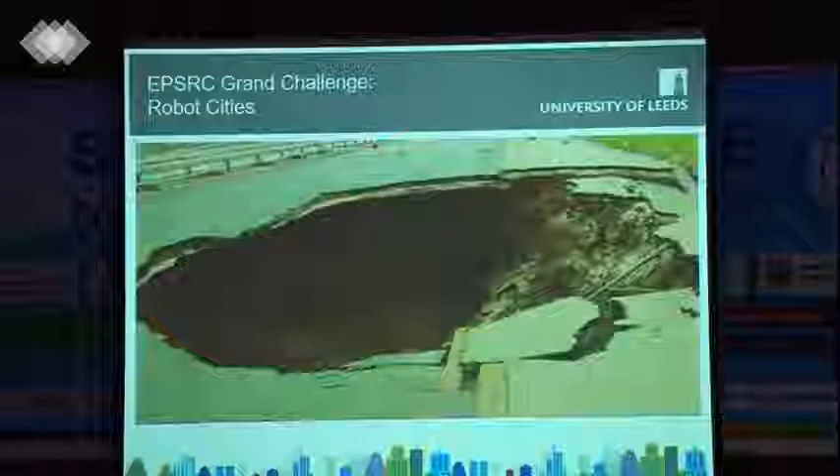Small crack results in this huge problem. And to fill that up, it's not a question simply of plugging it in. You've got to dig it all out, get material, put it in. It's a massive engineering job.

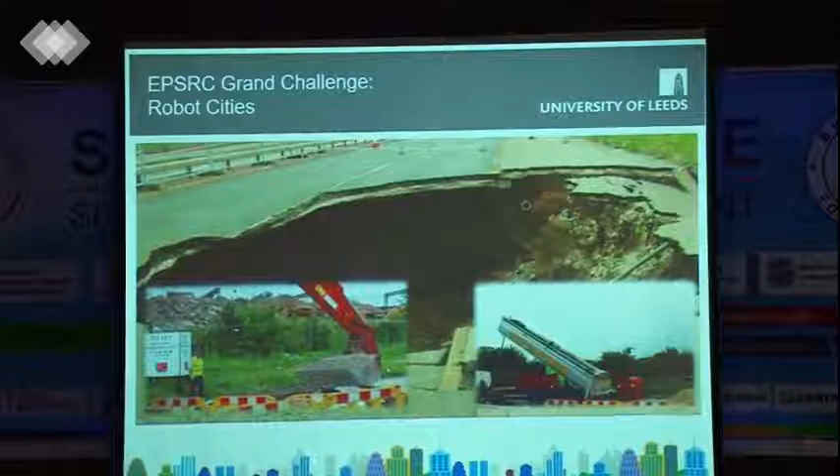So this project's really focused upon what we call minimally invasive or small-scale repair. So let's try and find problems really early on, fix them quickly, simply, and then this kind of problem doesn't actually happen, which is what we're trying to do.

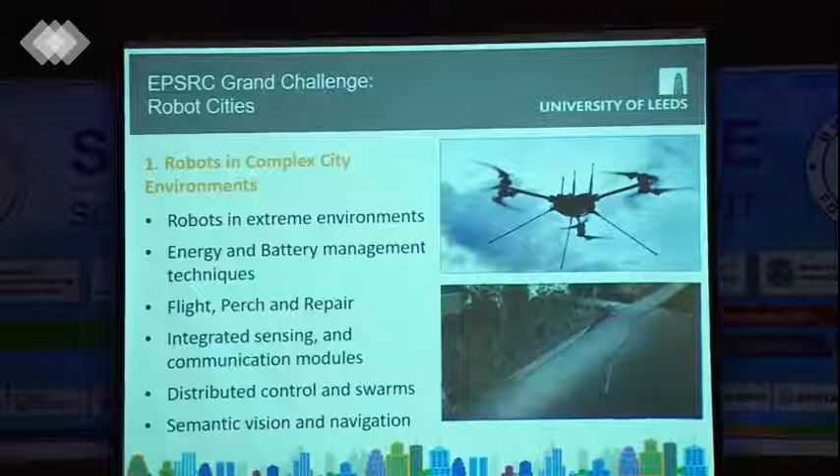So in the projects generally we have all kinds of autonomous robots. We have robots that can fly, perch on things, do things. Sensing is of course very important, sensing on the ground and in the air. We have to be able to apply materials to repair. So we're doing lots of work with how you can 3D print and deposit materials.

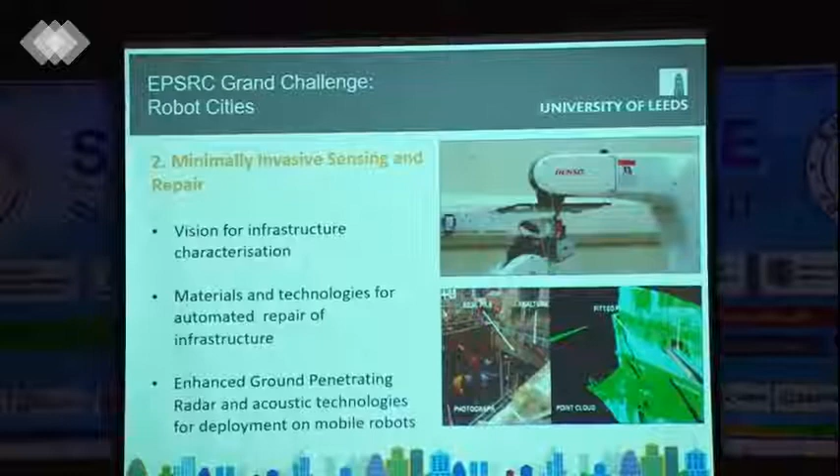So it's great to go and find a problem. Not an awful lot of use though if you find a problem and you can't repair it. That's not great. You want to find it, repair it straight away, and then you're done. So looking at how you can deposit material, how you can measure things in a crucial way.

But I think also one of the things that probably is least talked about in this kind of sector is technology is great, but it's a balance between technology, people, and also the environment. So we're talking about putting autonomous robots in this context across the whole city. So maybe we'll have, I don't know, 2,000 drones flying around the city.

The effect of the project will remove trucks, men digging holes in the ground, women digging holes in the ground. That's good. So there's no digging, there's no trucks. So it clearly has positive impact. What we don't know is how will it affect wildlife? Will the birds get really frightened at all these drones flying around?

So we can't just think about the technology, think about the wider social context of this as well. So light, noise, vibration, all of these kinds of things can be an issue in that context. We're also looking at how you can design future infrastructure. So right now, we're looking at robots that can try and repair current infrastructure.

That's difficult because certainly in the UK, lots of very old systems are not designed for robots. We must make sure that when new systems are being put in, they are robot friendly. So get some standards out there, get some robot friendly parts put in that we can inspect and repair more in the future.

And I guess the last thing on here, of course, very important, is actually the balance between humans. So lots of concern, I guess in the UK generally, about robots taking jobs, in particular in areas like construction and maintenance. So we're working very much to try and understand how we can make sure that it's a positive impact to the community generally, rather than a negative impact.

So what you want to be able to do is directly measure that. So volume versus area is what we're trying to do. So it's in the Khumbu area of Nepal, on the border of Tibet. So it's actually one of our student projects. One of our level 4, which is like the final year undergraduate students, is working on this.

The challenge is that the big lakes near the bottom are fine. You drive a truck there, you get a boat out, you row around the lake, you drop a few sensors in, you can measure it.

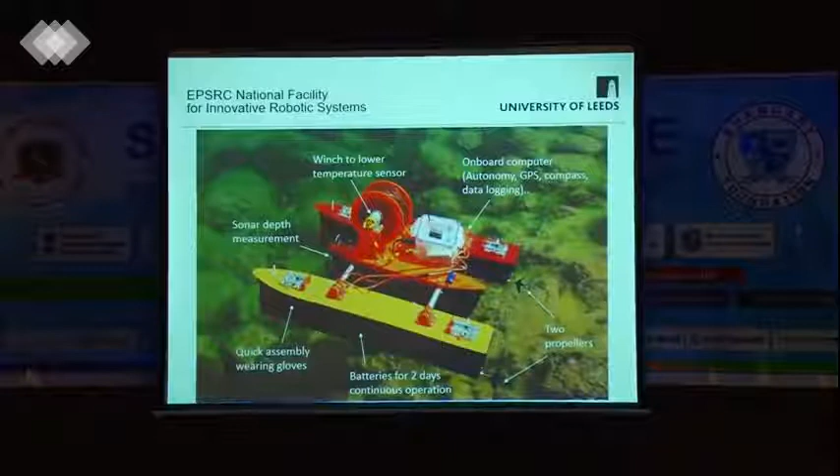So the big lakes aren't really a problem. The problem is where there are smaller lakes that are hard to get to. You can't drive there, you can't carry a big boat, it was just not feasible. So what we wanted was a really small backpack portable system we can take to the lake, deploy, and get these maps of things going on there.

So you'll see here, this robot has 3 sections. The 3 sections just unplug, go into a backpack, a normal size backpack's fine. You can get there, plug it in, and go. It has these huge clips on here, look a bit cumbersome, a bit kind of ugly, if you like. But bear in mind, it's cold. You're deploying this in the cold environment. The last thing you want is a screwdriver, a spanner, anything like that. So in this case, you can just pull the pins out, pull it apart in your backpack, and you can go, which is really good.

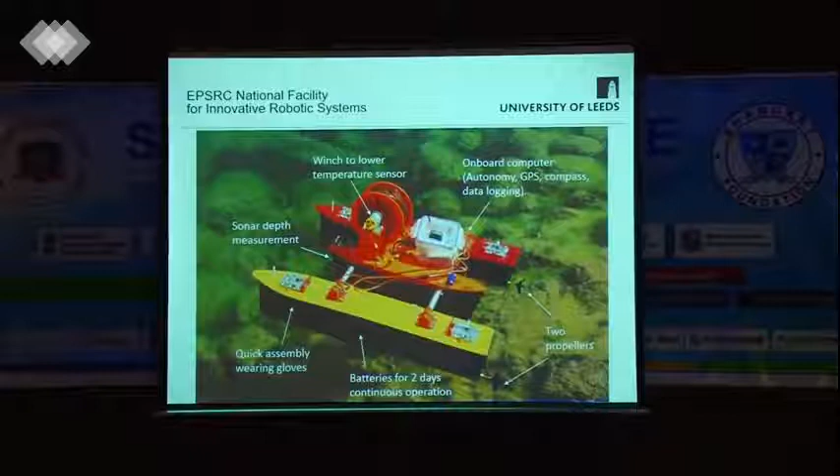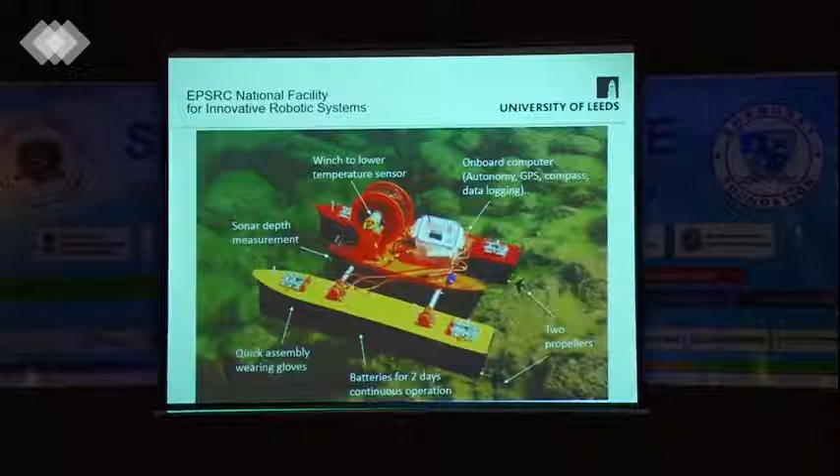So on the bottom here, it carries a sonar sensor. The sonar sensors work by pinging out sound. You measure the sound coming back, and you can work out how deep it is. So this middle section has a sonar sensor in to measure the depth. We also have, on the top here, a winch mechanism. So we're also interested in the thermal profile. We want to measure how hot it is as we go down to different depths. So you'd go there, try and station hold, drop the line down and measure the actual temperature at depths going down.

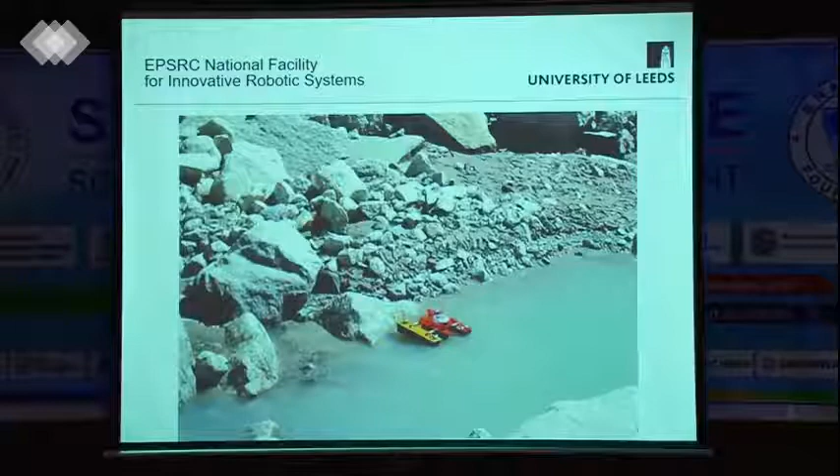So you can see here, an absolutely amazing place. I haven't been myself, but the team that went out there was absolutely amazing. You can see the little boat down the bottom here. Maybe you can, maybe you can't see. Beautiful scenery here. Go a bit closer. So it's kind of lost there. It's quite a difficult environment. Even this lake, one of our test lakes, is quite an easy lake to go onto, but it's quite a difficult lake to do things. So very easy to have problems and crash and that sort of thing.

This is a video of what it's like to be on a glacial melt lake. So we're driving around now, and it's quite flat. But you'll notice that there are things falling off the ice cliff. So not only is it difficult to get there, it's also quite dangerous to be going around on a boat there. You could get hit by one of these ice things. So it's a good task for a robot to go around there and see what's going on. You'll see it turn back and look at the guys over here. This gives you some scale. So this is quite a big lake. It's one of the test lakes they were testing it on.

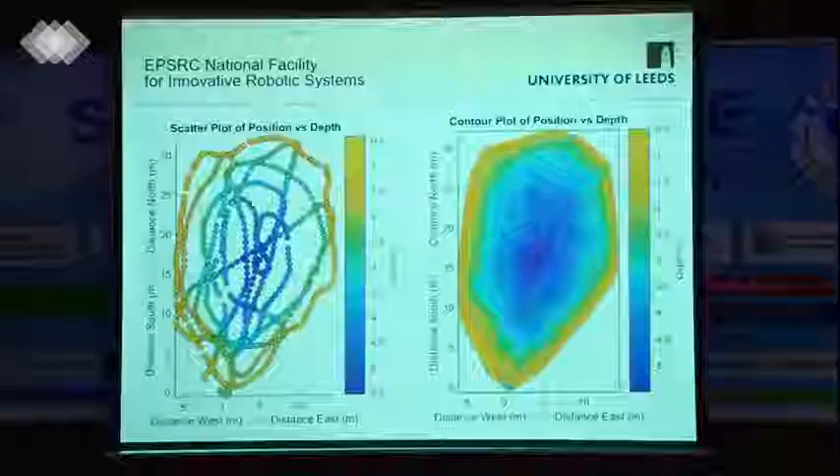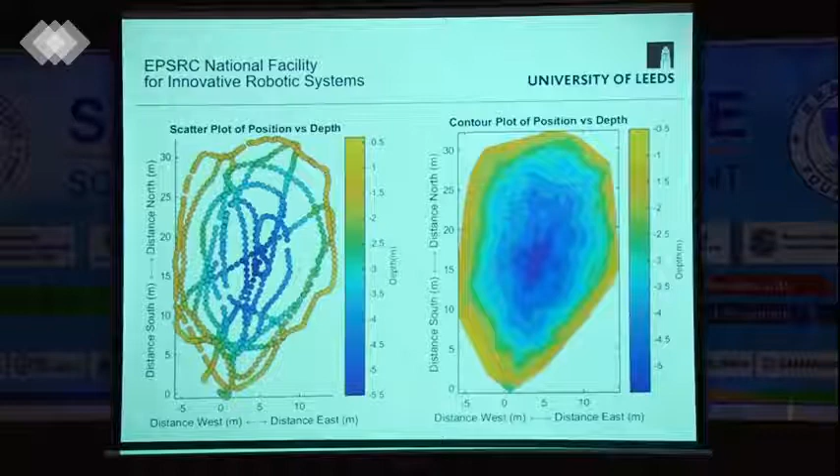So we used quite a low order autonomy on this. It's very, very hard for the robot to know where it should go. It can't really, using vision, detect where the lake edge is. It's very difficult to do that. So what we did, we take the boat out and you manually drive the outside. So you see the outside here, someone's manually driven around it. Then the robot itself does what they call a spiral search, getting outwards. You can see it's a bit crazy, a bit all over the place. It's getting a bit blown around, but it's mostly managed to do a spiral search, which is good.

And in fact, now we know this. So now we can pretty much guarantee that for a set of aerial photographs of the area, we can work out the volume, different times of the year. I'm not an expert in the area, but apparently it helps to do with global warming analysis, that kind of thing they're trying to do. I guess it's something to do with the energy stored in the lake, it's something to do with how much is melted, that kind of thing.

And the actual work's carrying on, so this was an interesting project, but now it's going on. It's actually a NASA-funded project now. They've taken it across to this project here, which is Understanding Changes in High Mountain Asia, and they're using it to map these kind of lakes. These are quite big lakes, actually. We're trying to map them.

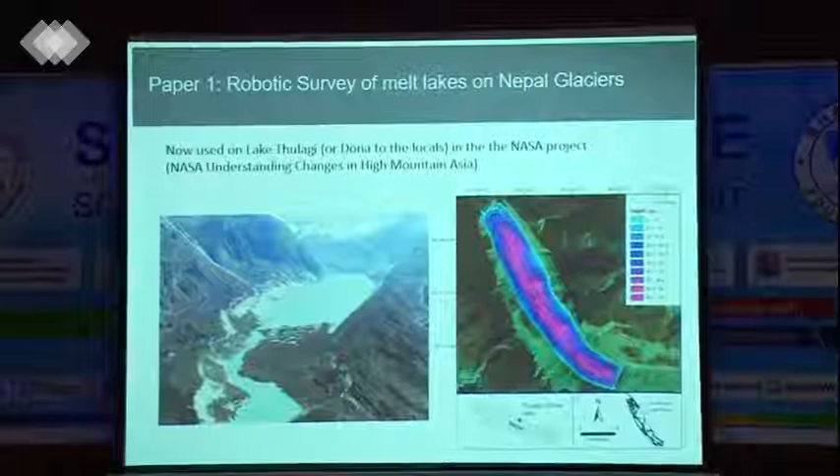One thing we do find, though, in this boat, it's a fantastic thing. It's not great at quite rough water. So it's fine in a glacial melt lake. They're pretty much crystal flat, if that's the right word. Very, very flat anyway. So that's okay. These larger lakes tend to suffer from more sort of turbulence.

We're also looking at doing a similar kind of thing actually in the Amazon. So it's interested in mapping the Amazon, its volume, or its cross-sectional volume in particular. So they have models of how water flows through the Amazon. These models, of course, assume a certain size of water flowing. If you don't know the depth of the water, you can't work that out, and that affects things. So what they want to have is a boat that can cope with this river. Of course, it's much, much more turbulent.

So we have a project right now looking on a really high-performance version. So the other version was great. It could run for probably a day, 2 days by itself. The high-performance version will be able to cope with quite rough terrain, turbulence, and that would be good for things like the Amazon River in the rainforest, that kind of thing.

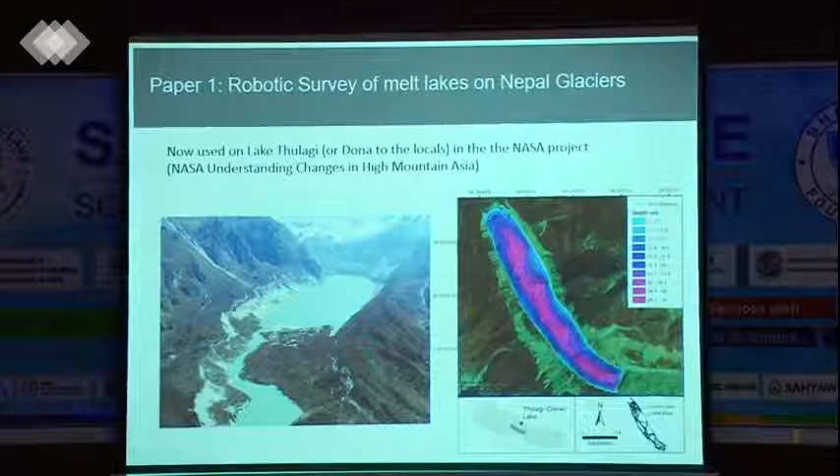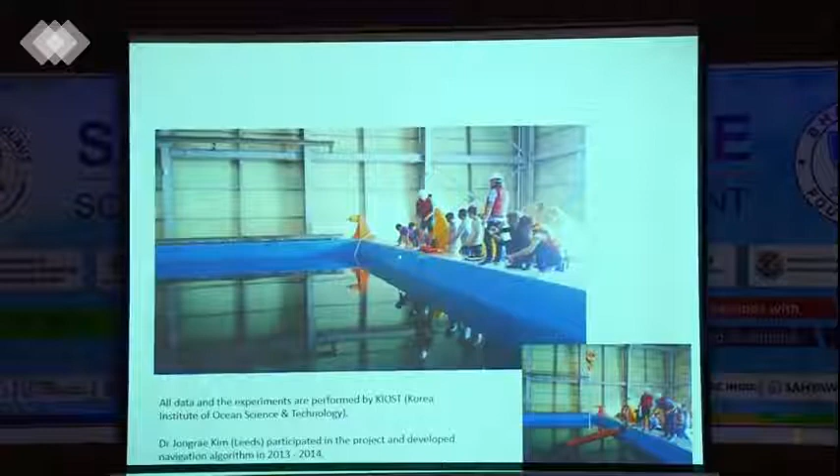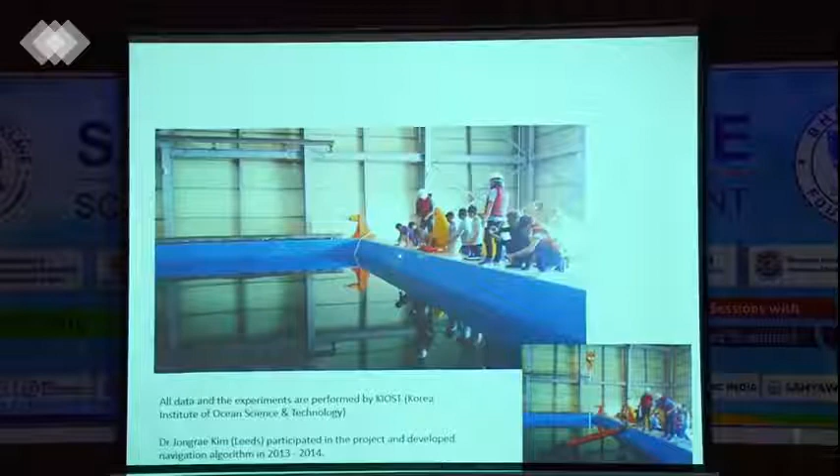So another project here. This project's all about doing actually long-term inspection in the oceans. So you have a thing called ocean gliders. You probably haven't heard of this, but what they want to be able to do is go in the ocean, be there for years. Really, really long endurance, floating around, measuring things like the currents, that kind of thing. But it's very, very challenging to do that. Most of the time, of course, you're actually underwater. If you're underwater, you get no GPS signal. Very, very challenging.

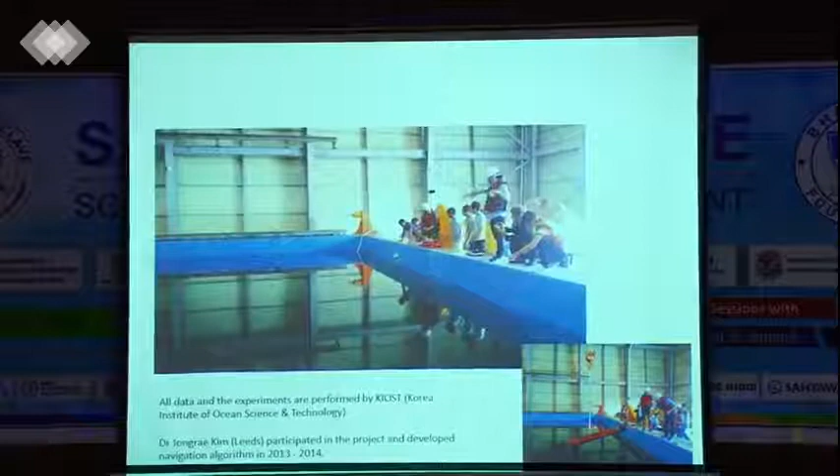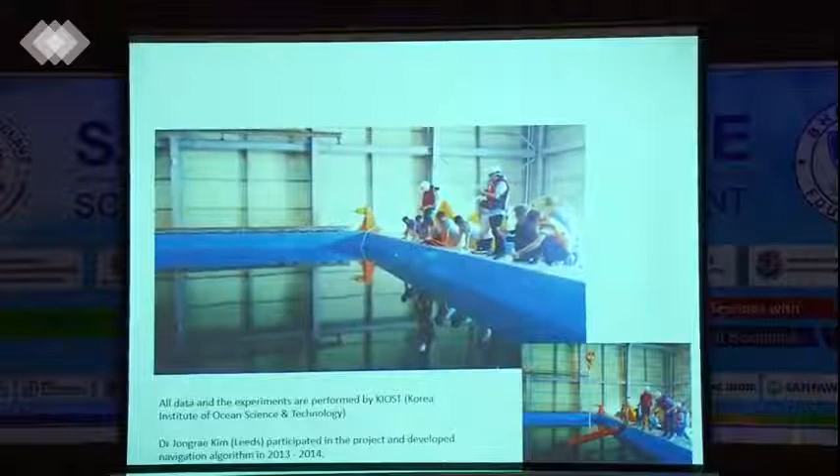So I'm going to play this video here. It takes a little while to come through, but basically this is a glider here. It's been deposited in the water here. So it's working with a guy in Leeds, Jongrae Kim, and this Korean institute here. So in a few moments, you'll see it start coming over here. So it's a good example because it shows how gentle and slow it is. We're not talking at all about really high-powered things.

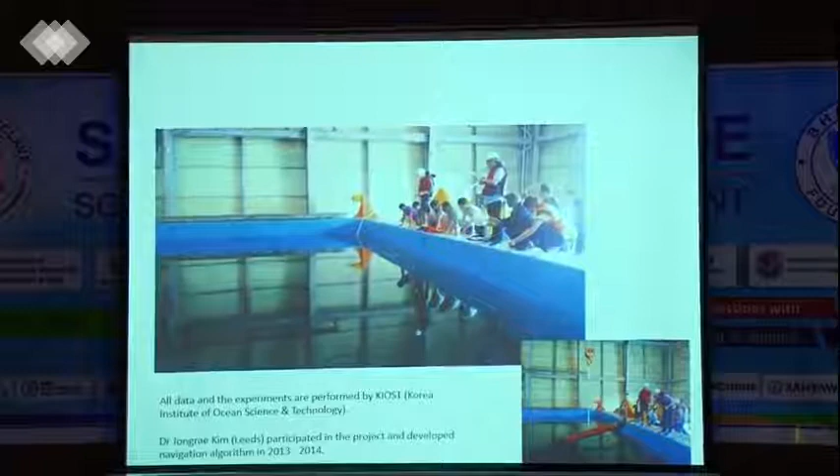It's gliding around. It's using the waves, using the natural currents to glide around. You haven't got a big motor on it. You can see here there's like no disturbance. It's really slow, really, really sort of gentle stuff. So in a moment, you'll see it kind of appear down here. And that's the idea. So it doesn't need much energy.

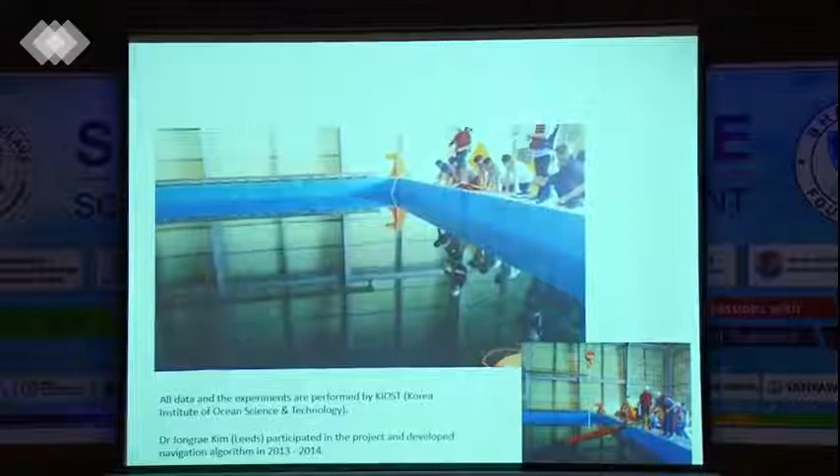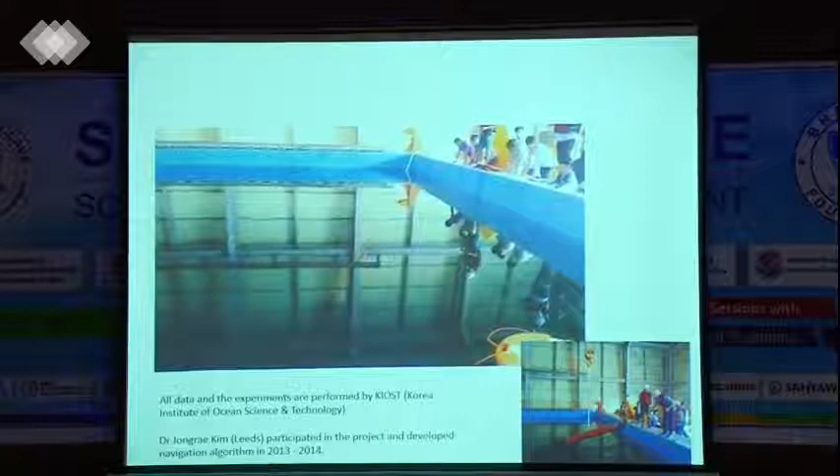It can recharge in sunlight occasionally, but you want it just to go away and just float around and measure things with some kind of navigation or steering. So you can see it just starting to come down here now. So really slow sort of motion of this sort of going down here.

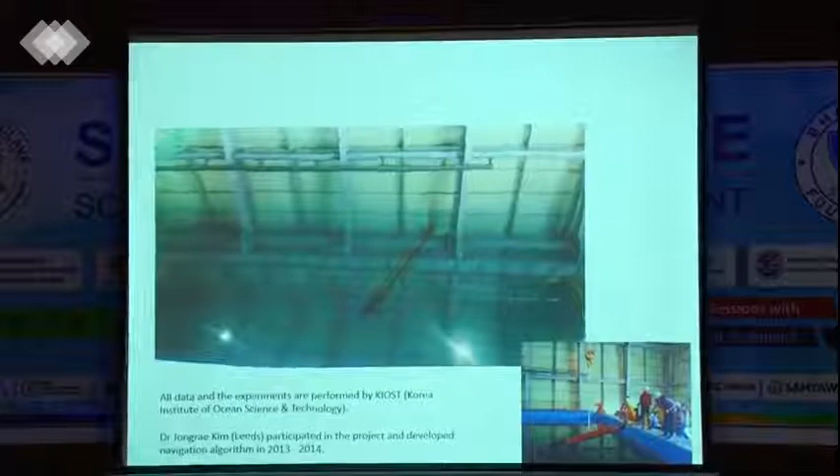So the challenge here is you're going to submerge underwater and you need to be able to know where it's going to be. So you submerge, you want to go in a certain direction, you have currents, it's really difficult. So I'm not going to give you lots of equations here to worry about, just for the example here. But basically, on board the vehicle, you have what's called an IMU, an inertial measurement unit. As it's getting bumped around, as it starts to accelerate, it can measure its acceleration.

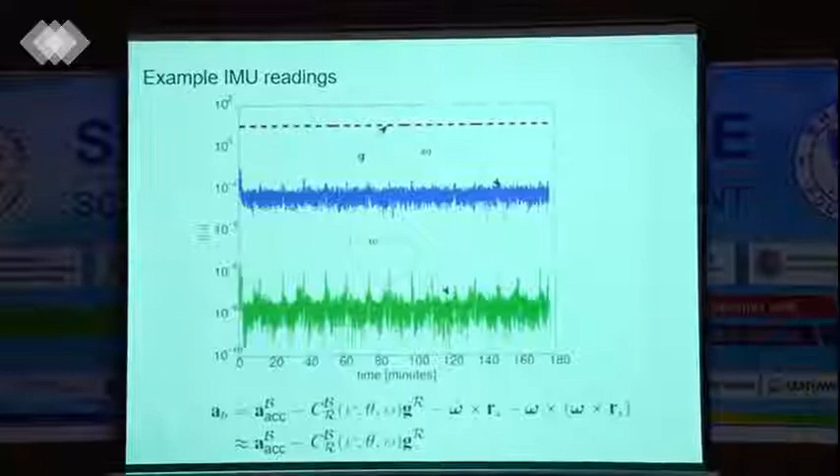It knows what's happening to it. And from the acceleration, you can kind of predict where you're going to go. So if we look at some of these things here, you can do things like working out velocity. So you can try and integrate the acceleration, try and get the velocity. It's very, very difficult. But we can do some clever things. I won't mention it here, but there are some clever mathematical things you can do about collecting data, to do statistical things, to try and improve the estimate to get better velocity.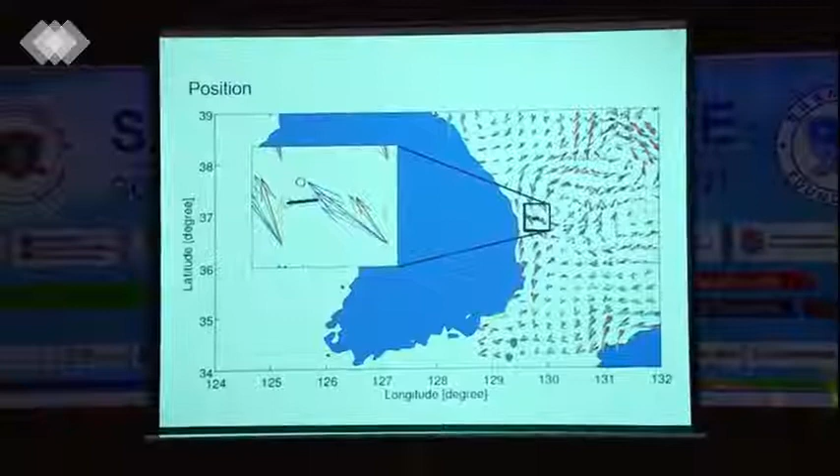But what you can see here is an example. So this is a landmass here. This is current. The currents are all over the place, changing in different directions. So the actual vehicle thinks it's going to be here. It's actually here. So it goes underwater, submerses. It comes up. As it comes up, it gets GPS. But the estimate of where they think it is is a long way off. This is a big problem because you can't just then power yourself off. How do you get back to where you want to be?

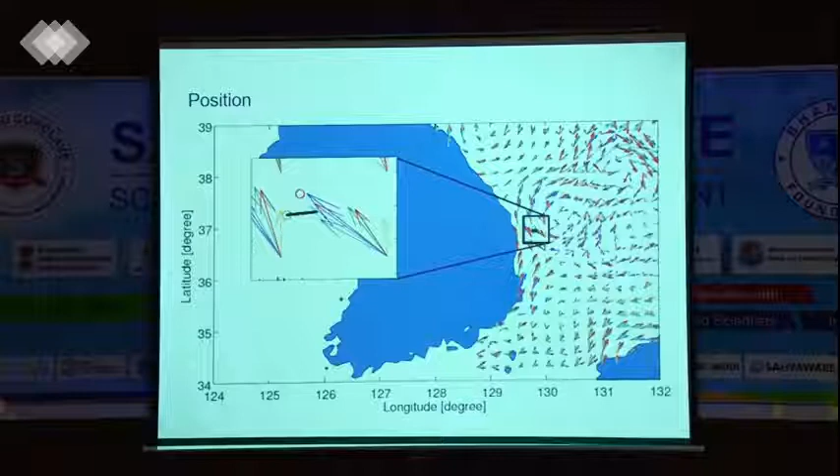So using mathematical techniques, statistical techniques, you can try to improve the estimate on this. And you can see here that we have a much better estimate now. So this is the initial position. It went underwater. And these two things, so the red one is where it actually was, and the orange one is where it is. So we get a much better estimate of where it should be underwater with all these kind of gradients here. So it's quite successful, but it's a very mathematical thing to do.

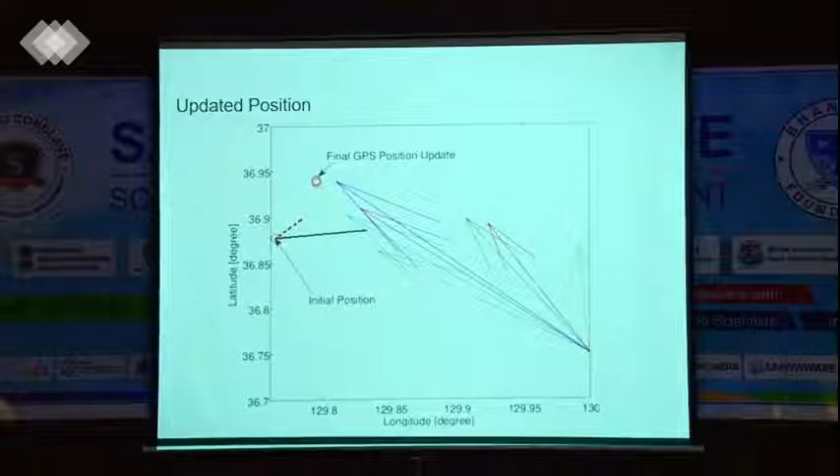But you have no choice because you're underwater. What else can you measure? You can't measure features. You can't measure GPS. The only thing you know really is your inertial movement, being pushed around in the water. So these are the ocean ones I've shown you so far. I want to mention the in-pipe thing.

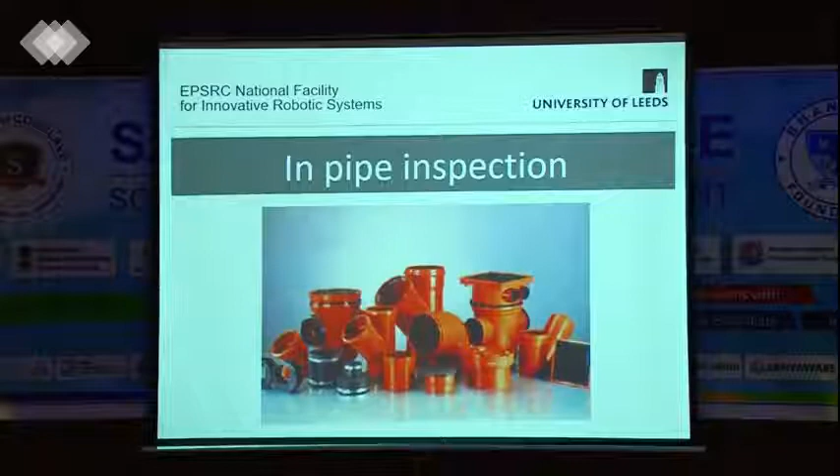People often say to me, what is going to be the biggest robot impact in the next 10 years? And they expect me to say it's going to be autonomous cars, or a humanoid robot, or some kind of companion. But to me, the best business case, the most important thing we can do with robots is inspect pipes. It sounds really dull. The reasons why it's good, though, are because it's a simpler problem. In pipes, there are no people, relatively predictable, albeit environmentally challenging for the robot itself. But the benefits are huge.

So if you can repair cracks, there's no digging of the roads, there are no roadworks, there's no associated pollution in the environment. So the business case for having robots in pipes is absolutely enormous. So that's really one of the things we focus on. Autonomous cars have lots of benefits. But to me, it's all about robots in pipes. So I'm going to give you an example briefly of a kind of pipe robot.

So you can see as we climb up here, we can see different features of the tunnel. So you can do all kinds of mapping, very similar to what you would do in a water pipe. You'd drive along, you'd use cameras, you'd use sonar sensors to measure the wall thickness. Here, we really care about the features on the wall. In the pipe context, you'd often use sonar sensors or ultrasonic sensors to see the depth of the wall. So often you care about the thickness of the pipe rather than just the features.

In this case, we just care about the features of the actual pipe. And you can see it here climbing. So it's very similar, like I say, to what a water pipe might be. We're driving along here. We have our articulated body.

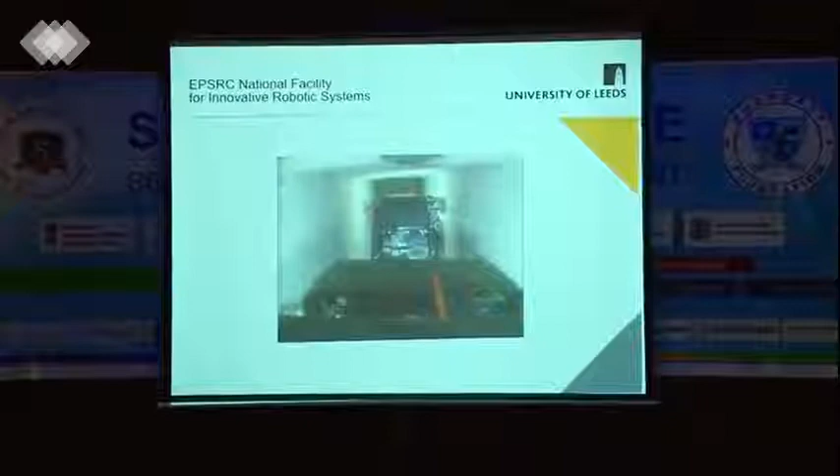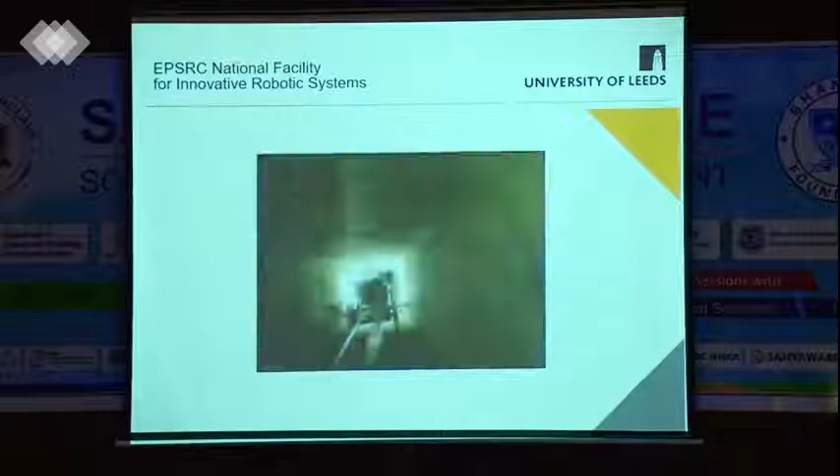So what happens is the robot gets longer. It has these pads that come out and grip the sides. You'll see in a second the back also has pads that grip as well. So these pads go in, so you can kind of gradually crawl along the path. So this is one way of climbing in pipes.

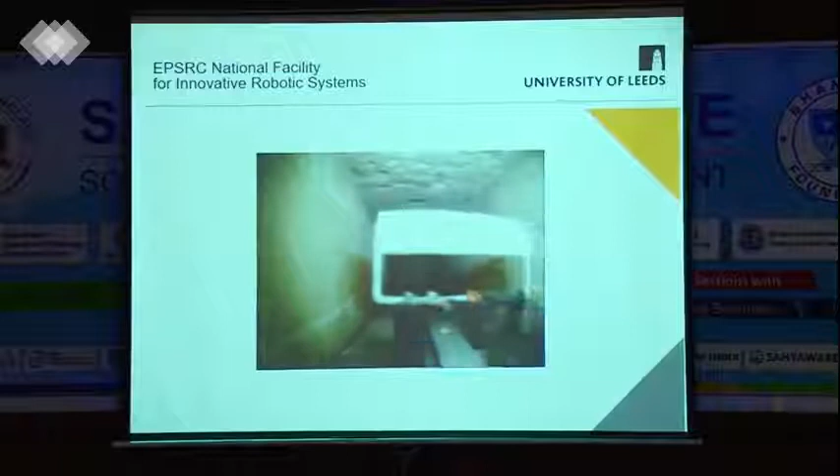It's called a wall press because you're pushing on the outside of the wall, therefore you're getting enough traction. With this, we could climb up, we could climb along. It's enough force to do all kinds of weird climbing maneuvers in different pipes here.

So that's a simple one. The problem with that, of course, is it's quite a long, straight robot. We've also built more complicated robots to go around bends and that sort of thing.

So in this case here, we've got quite a complex robot. It has 12 different actuators. These pads here are what grip to the pipe walls. And you'll see here it moving here.

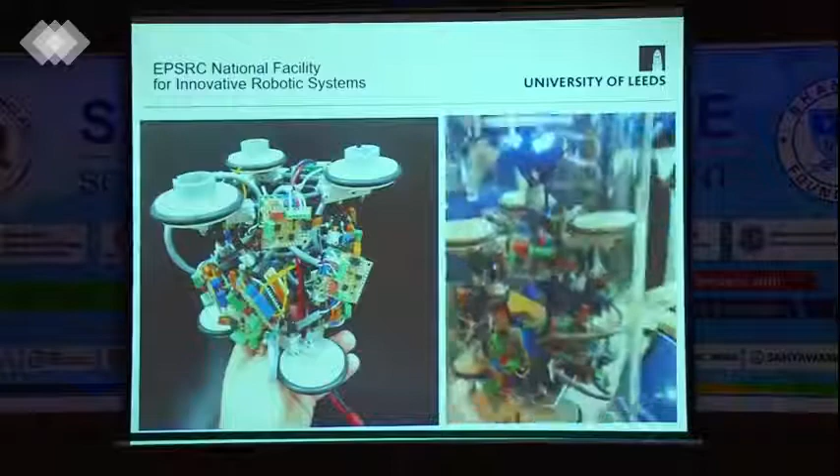The reason it's so complex is because you want to be able to choose, if you approach a T-junction in the pipe, which way to go, you want to be able to rotate it around. So you can see here what it's doing. It's climbing, but as it climbs, it's also spinning. So you have control of rotation, as well as control of direction, and some control of which direction you go in. So you can choose which direction.

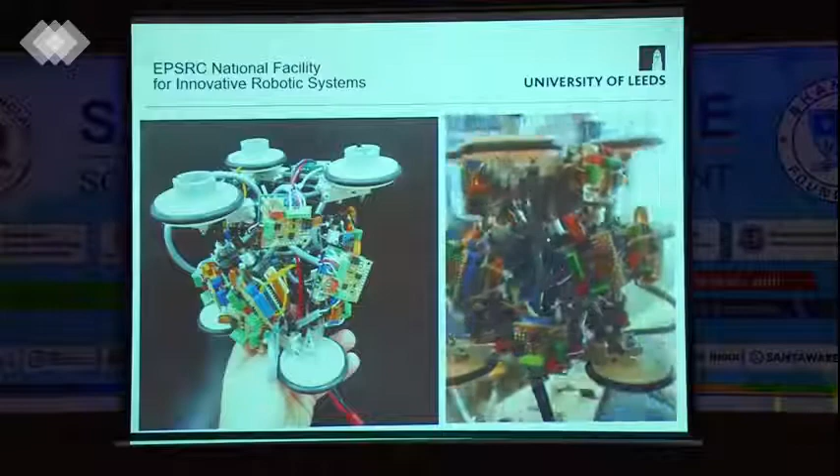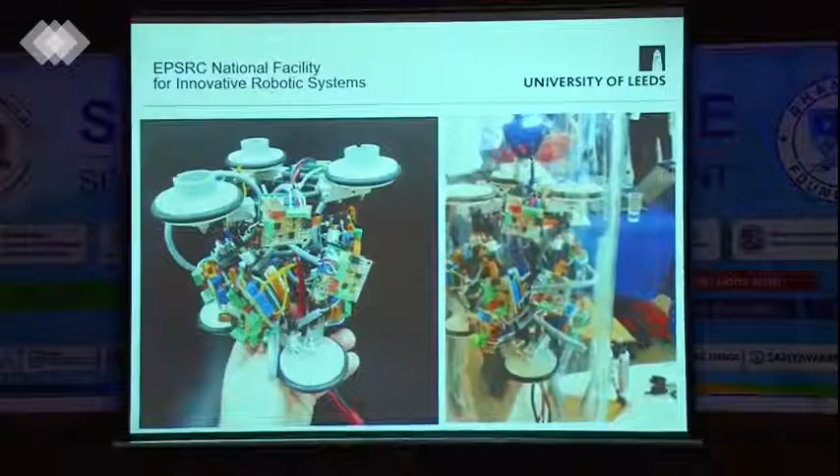For those of you who know about robotics, effectively it's a Stewart platform. It's like a Stewart platform which has two plates with lots of actuators that can control the two plates, and the plates can also extend and grip the pipes. So it's an example of a water pipe robot.

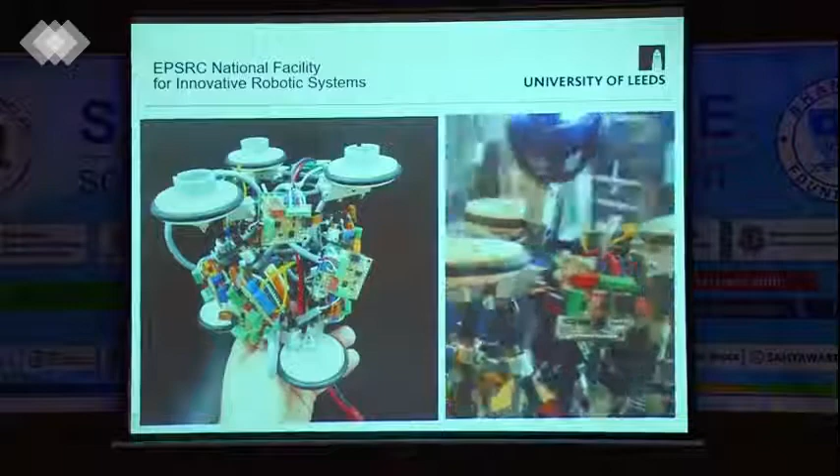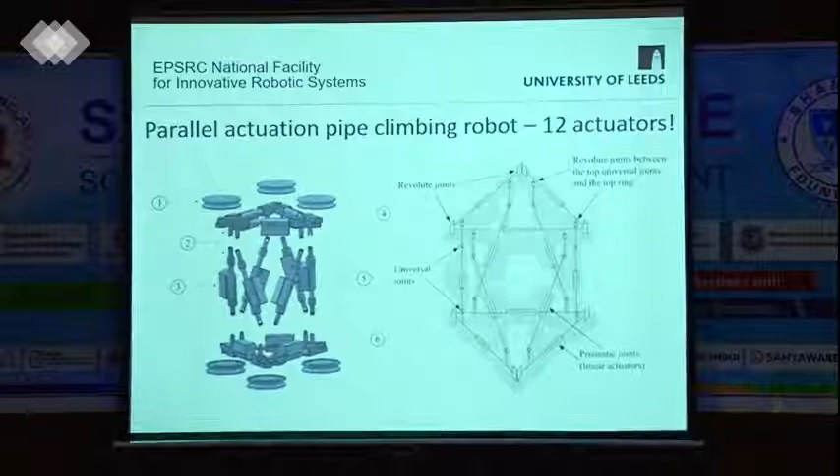Of course, one of the challenges we have is we don't want to block the water pipe. So ideally, it would be quite slender. So this was actually designed to be hollow. Right now it's full of all kinds of weird electronics, it's a prototype. But effectively, in a skeletal form, it's quite thin. So you have an outer casing, water can flow through the middle, so potentially it's going to be relatively low drag. What you don't want to do is put in a big object if you can help it.

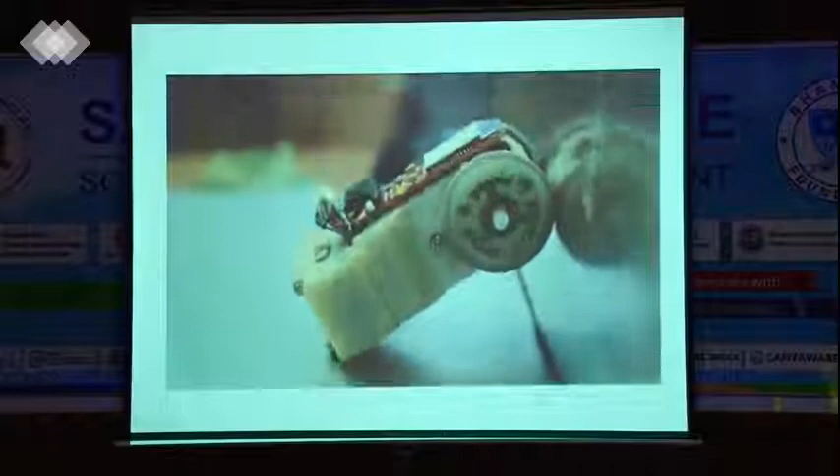So if the pipes were metal - some pipes are, most pipes aren't actually for water - if they were metal, it's much easier. You put in small climbing robots. So we have here, this is actually designed for gas pipes, but small robots that can climb in metal things. You can grip on the surface, and you can drive around, and you can inspect things.

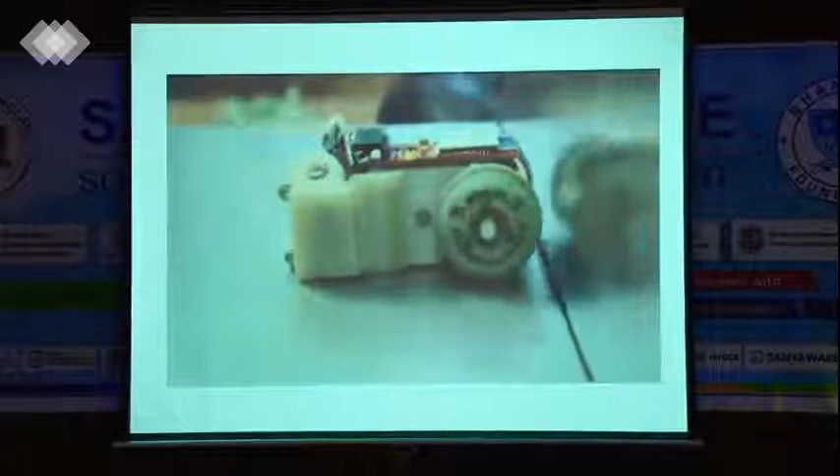So in the gas industry, working a lot on these, particularly very large bore gas pipes, to inspect them with magnets. I'll just show that again. It looks quite simple, so the transition between flat and upright on here looks easy. It's actually really hard. If you're not careful, what happens is either you stick to one surface or the other. The ability to be able to drive is actually really difficult.

Of course, the worst case scenario being a square, but there are sort of junctions and that sort of thing that might be difficult. What we want to do in the gas domain is there are entrance pipes coming in, quite small diameter pipes. We want to be able to drive through small pipes into a very large pipe, survey the large pipe, and then drive back out again.

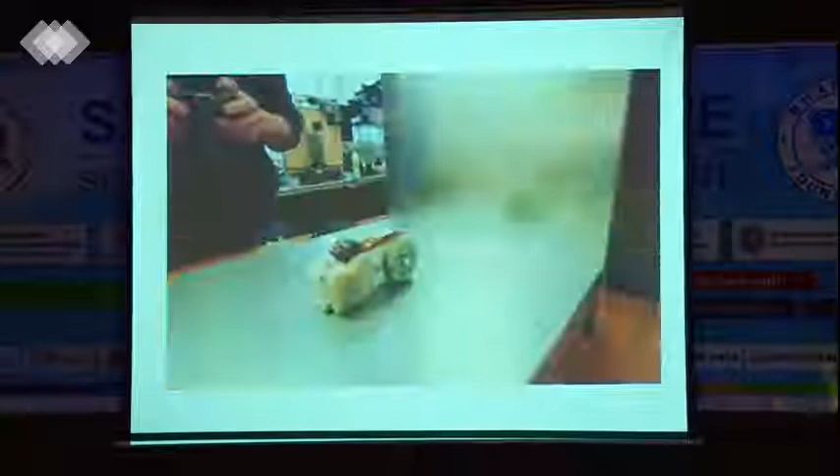But that means going from - basically you've got a perfectly round pipe, a pipe comes into it - you need to be able to drive from the outside of this and drive into the pipe. Really, really hard. So we're not quite there yet. We can do some things, we can't quite do that.

So I'm going to talk a bit more about sticking to things. I mentioned magnets already so far. Of course, you're saying, okay, well, water, how can we stick to things that are wet, that kind of thing. So it's actually a medical application, but it's very relevant to wet surfaces.

So we're doing some work building small robots to do surgery. So the problem is that you're doing laparoscopic surgery for the human. So you have this thing where you're doing surgery through a small hole. You want to minimize the number of holes, but you want to see what's going on. So you're doing surgery through a small hole, you want to be able to do things.

How can you minimize the actual effect of that? When you perform the surgery, you inflate the stomach. Bear in mind, you've got a small hole, you put gas in there, your stomach becomes very big. So there is space in there.

So how do we put a mobile camera inside the body? That's the question. You could put a small robot inside and try to walk around, but you can imagine trying to walk around all the tissues, all your organs, intestines - really tough.

So the other approach is, let's try and walk on this surface here, the surface of the stomach. It's inflated, there's plenty of space. The surface is very sticky, gooey, difficult to actually walk on - kind of slimy, but it's clear and flat, which is a good thing. So the question is, how do you stick to wet tissue?

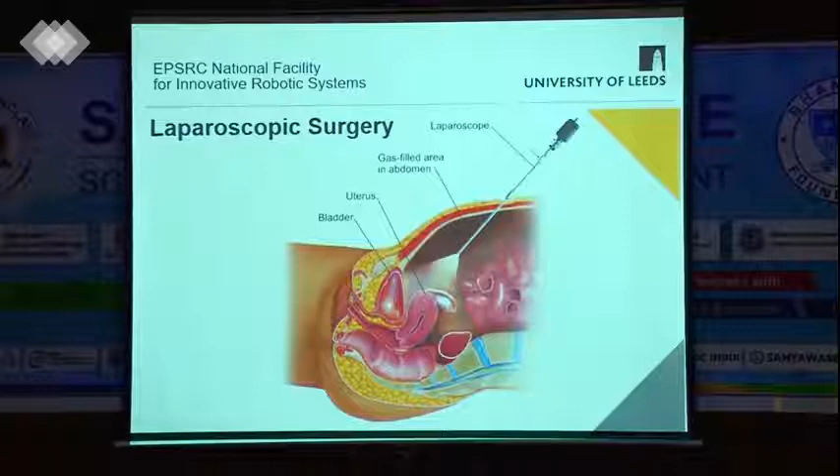So we look for inspiration on this. You don't want to have metal things - if you start sticking metal feet into it, gripping it, you're going to damage the surface. You want a very gentle thing that can stick to very wet material, like some kind of robot that can do this.

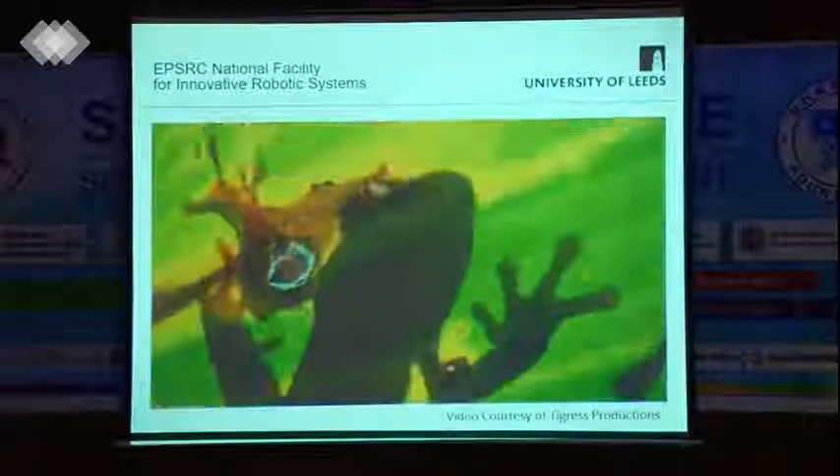So we took inspiration from the tree frog. The tree frog lives in the jungle in the Amazon, and it has feet that can stick to wet leaves - very slippy, very wet leaves. So that's what we tried to do. Wouldn't it be great to have a frog that you could put in your body for surgery? Not a real frog, of course, that would be pretty harsh. But a robot version that could walk around inside your body would be a really good thing to do.

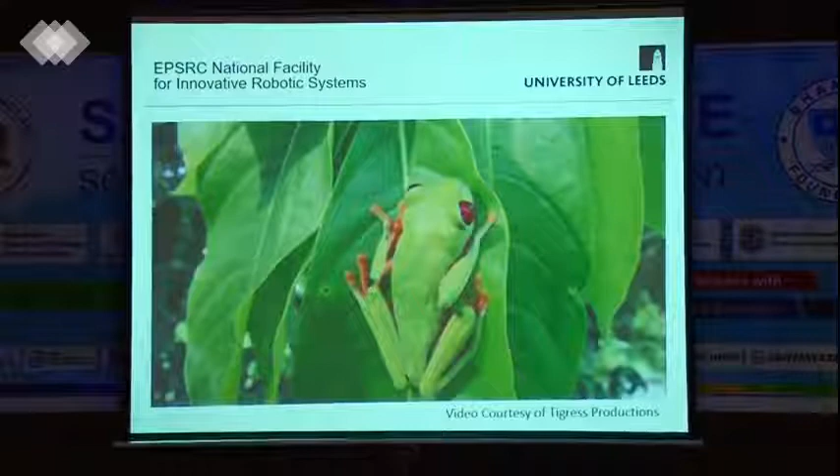So the question for the research is, how do frogs stick to wet tissue, wet material? If you look at their feet, they have what they call micropillars - very small patches with gaps. When you touch wet material, you get water on both sides, and they form what's called a fluid bridge, which causes some kind of adhesion. So effectively they're quite sticky.

So we went away and we tried to fabricate these. I showed you earlier about manufacturing at different scales - big scales and small scales. Here, we're using very small laser-etched, light manufacturing to make incredibly small pillars that are like the frog feet.

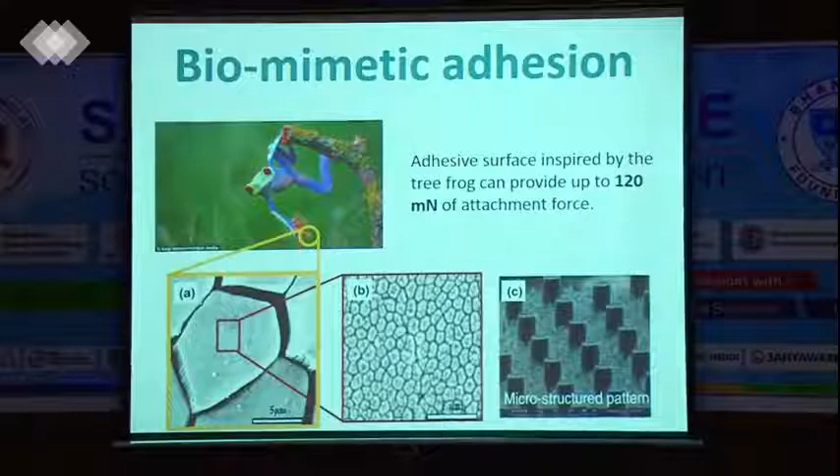To the naked eye, this is totally invisible - you can't feel it with your finger. They're there, but we made them. If you look at an electron microscope and zoom in, you see really, really small micropillars, and that's what causes the adhesion force. It's quite a low force - about 20 grams per centimeter - but perfectly adequate for a walking robot to walk around in skin tissue.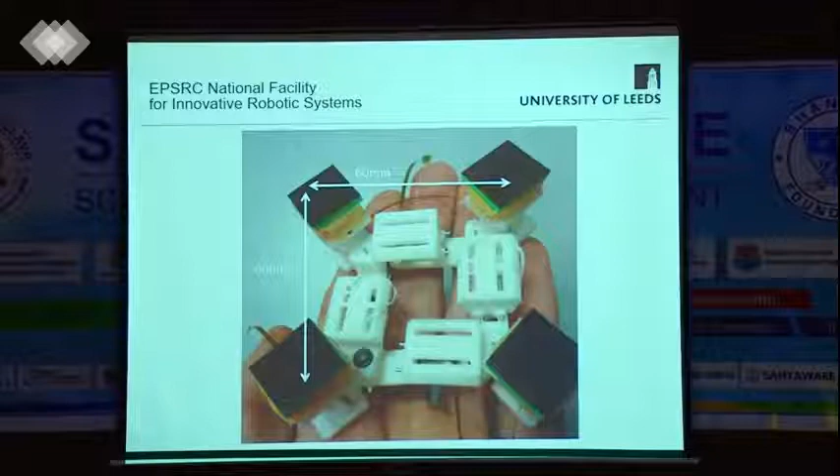We talked at the beginning about motors - this has micro motors, very small motors, 5 millimeters squared, really small. There's a motor here, here, here, here, and also motors that push these out, so you have all these motors inside pushing them out. At this scale it's too big to go inside a human body, just an example - the motor's probably the right scale, but the thing itself is bigger.

Here's an example of it walking on metal - we just changed the wet tissue stuff for metal, for example. You can see here it's walking okay, it can walk around on the surface. You see the motors here, very, very small, 5 millimeter motors, really titchy little things, but they provide enough force to be able to move and do things.

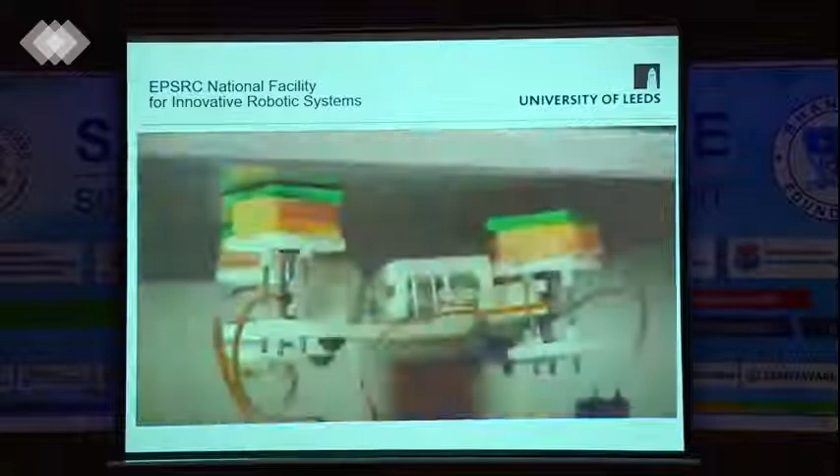One of the things with this that's very hard to manufacture, when you stick to material, if you push it on, it takes not much force, but to pull it off is very hard. Of course, by definition, what you're trying to do is make the maximum possible adhesion force, sticking force you can.

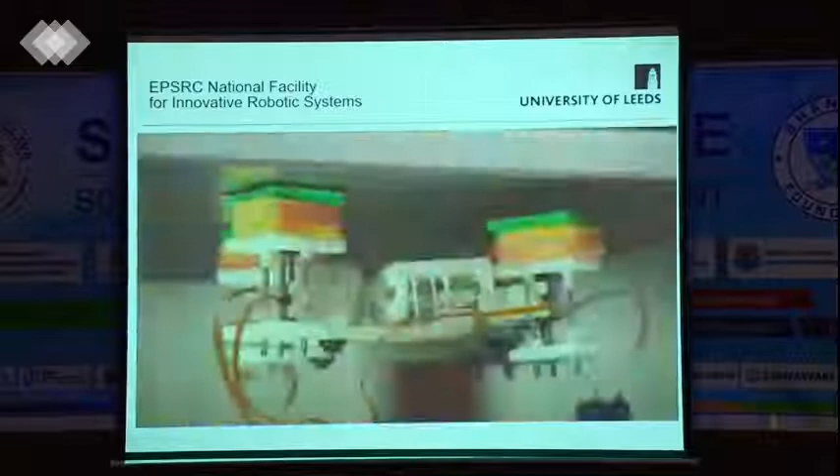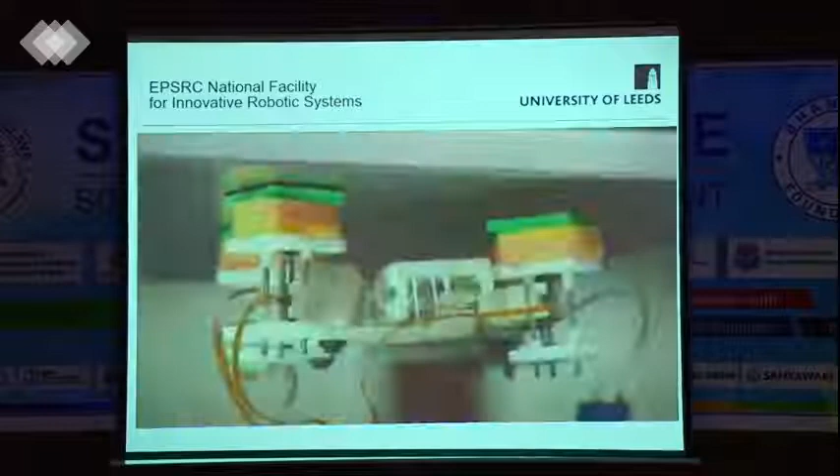What the tree frog does, it puts its foot on. As it pulls its foot off, it bends and curves its feet, so if you peel off your foot, the force required to remove it is much less. We deliberately made it so that as the pad comes off, it slightly twists, and that twisting motion reduces the force, makes it easier to pull off. You'll see here the back end comes off first, so applying a little bit of a twist reduces the force quite a lot to pull it off. Otherwise you're wasting a lot of energy trying to pull your foot off.

So it can be done in that context. I should say though that we are obviously still a long way off the challenge of making them the right size. Right now we're 60 millimeters, and to try and fabricate them smaller is a massive challenge.

So the actuators are okay. This was made by one of my PhD students, in fact, and he spent weeks with tweezers, small metal bars, trying to assemble it, trying to get it to work. So it's just not good enough.

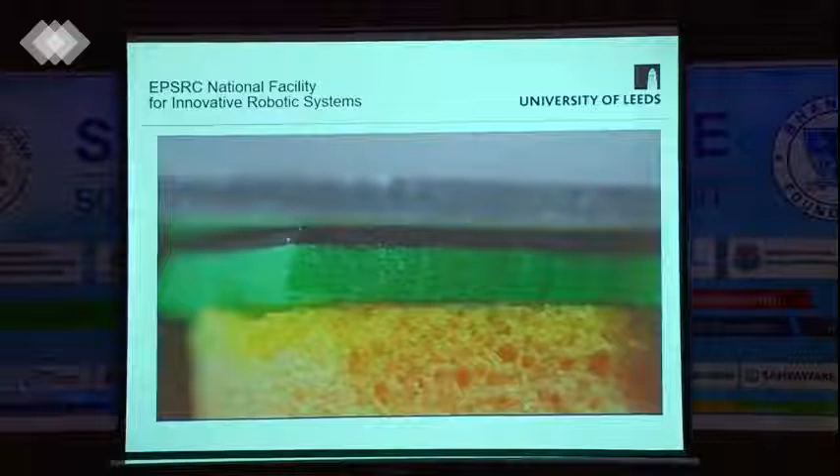So in Leeds we have a whole facility for fabrication of quite complex systems, and using this was an example to get the funding. We said, look, we can do this amazing stuff, we just can't build great robots. So we have this facility now, saying we can manufacture these things at different scales to very high precision. That's what we can do.

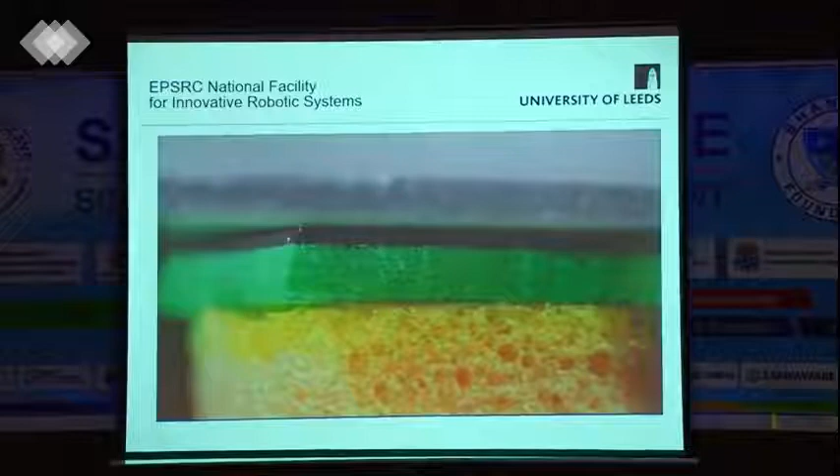One of the things we're trying to do is what we call minimal assembly, so 3D printing that can print things that work in one go. You press print, it makes this in a functioning form, and there is no assembly, which is of course what we want to try and avoid.

Going forwards, really our vision is much more around inspection of pipes, but with the smallest possible robots. I've shown you robots that are quite big, and robots that are quite small. In this case, we want to have swarms of small robots. You can see here the illustration of what we've got, little fish if you like. That's what we want, little fish that can swim around in the pipes and do things.

Using all the things we've seen before, maybe some of these smart actuator technologies, certainly micro manufacturing techniques. As the water flows, it needs to be able to go and stick to surfaces so it doesn't get washed away. It needs to be able to swim ideally against water, and if you're going to swim against water, that's really, really hard. So we're struggling with that kind of thing.

As part of this work, we're also looking at how you actually go about mapping them. We mentioned mapping pipes - what you want is systems that can understand like big data things, what's being mapped, what's not being mapped, and try to bring it together. So we have all these systems on that.

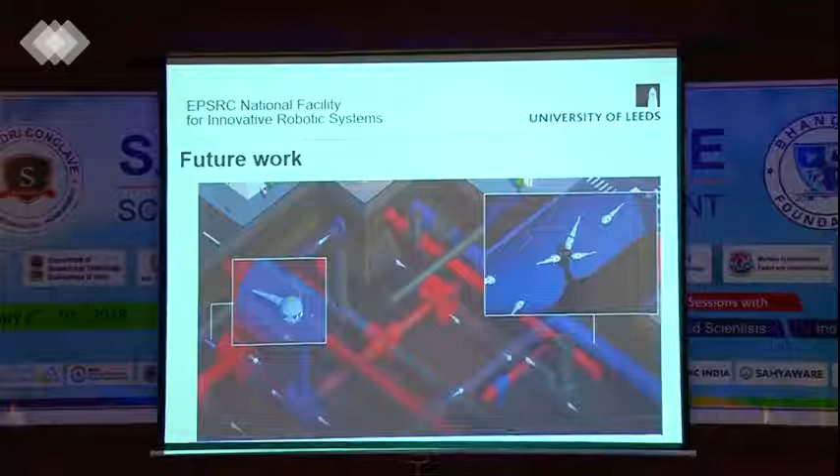But as I mentioned before, data communication is really hard. If you have 100 robots in the pipe network, communicating from them to the outside world is really, really hard. We can do things like communicating robot to a communication node, or spraying material - maybe it finds a problem, sprays the location with some kind of marker, then another robot comes later to fix it. But communication is a problem, energy harvesting is a problem, and manufacturing is a problem.

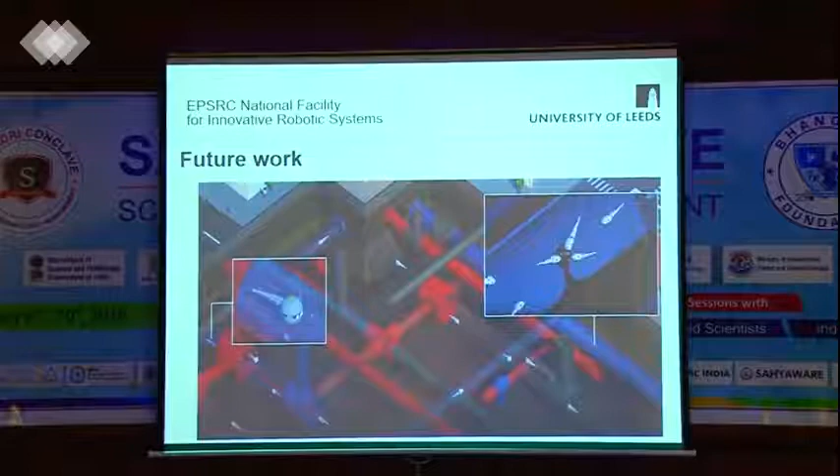So it really is a grand challenge, and hopefully we're trying to solve that, but it's probably going to be a good 10 years off, I guess, in that context. Okay, so I've gone through robots for water. I guess the thing to point out here, just to summarize what we talked about, they're really good. I keep saying business case, but I think these days we have to say business case. Business case meaning economical, societal impacts to do this, which is good.

The challenges are very hard. Water is a difficult environment: high pressure, low temperature, corrosive environments, very challenging. But you can see with some good design, we can produce some good things. And I'm sure that some of you will go away at some point and start companies to make these robots that can work in water. And I think if I was starting out now, I'd be going away and making robots that can go in water pipes and making a fortune.